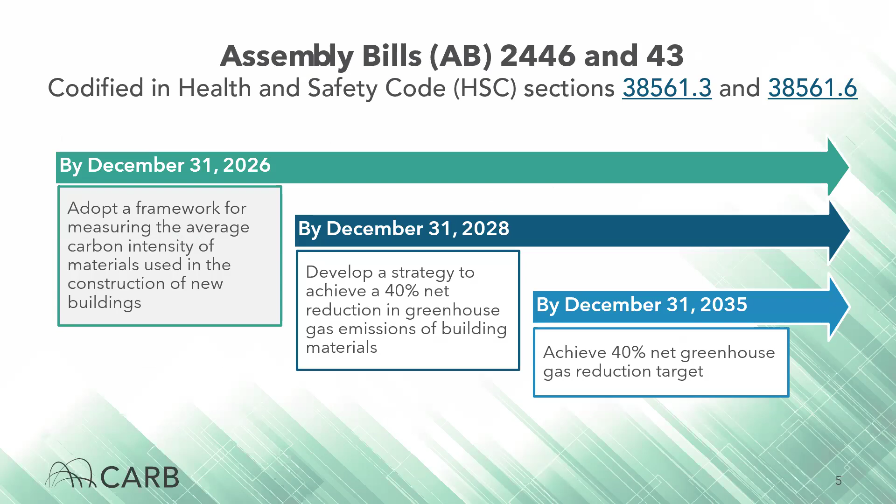I want to take a moment to revisit the statutory requirements that the concepts today are responsive to. Statute requires reporting for both covered projects and building materials, which are detailed in three key subparts of Health and Safety Code Section 38561.3. Under Health and Safety Code 38561.3(c)(1), construction projects with a minimum size of 5 residential units or 10,000 square feet of non-residential building space must submit a life cycle assessment, or LCA, to CARB.

In addition to project reporting requirements, building material manufacturers must also provide environmental product declarations, commonly referred to as EPDs, or other similarly robust life cycle data for the products they produce. Additionally, manufacturers of building materials are required to report data to CARB to ensure their products comply with applicable reduction targets in accordance with reporting and compliance requirements.

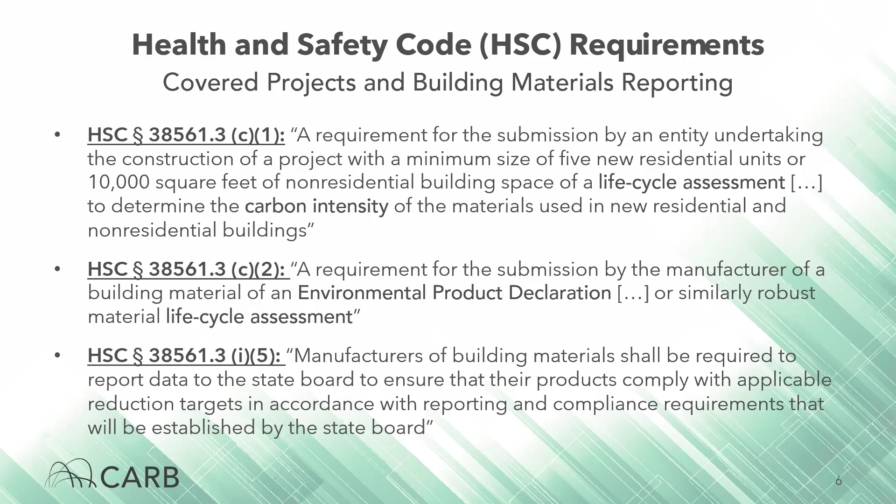CARB embodied carbon staff have conducted 2 public workshops, the first in September of 2024 and the second in March of 2025, and discussed both concepts for the framework, including the baseline and embodied carbon reporting requirements. At our prior workshops, we introduced staff concepts for building embodied carbon and our initial thinking on how to develop this framework. We discussed the statutory requirements guiding this reporting system, which I just recapped, and major milestones for the program to work towards. We also illustrated staff's initial thinking on which projects are covered, who the reporting entities are, and what would be the potential exemptions to reporting requirements.

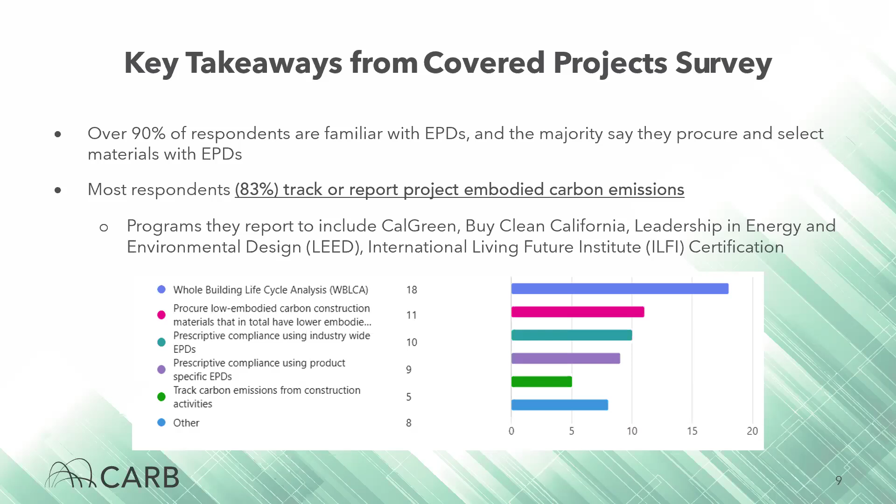As I mentioned in our last technical meeting in September, staff presented our concepts for a methodology to estimate baseline greenhouse gas emissions from California's building sector. So what is the baseline and how is it used? Well, the baseline is a profile of the current greenhouse gas emissions associated with building materials in California's building sector. Establishing a baseline is critical for two program functions. First, the baseline provides a snapshot of where emissions are concentrated in the building sector.

This allows CARB to rank sectors and materials by impact and to focus reporting and reduction strategies where they matter most. Second, the baseline allows CARB to quantify how much emissions reductions would be required to meet legislative mandates of a 40% net reduction target by end of 2035. The quantity of emissions reductions needed can then inform reduction strategies in future rulemaking sessions.

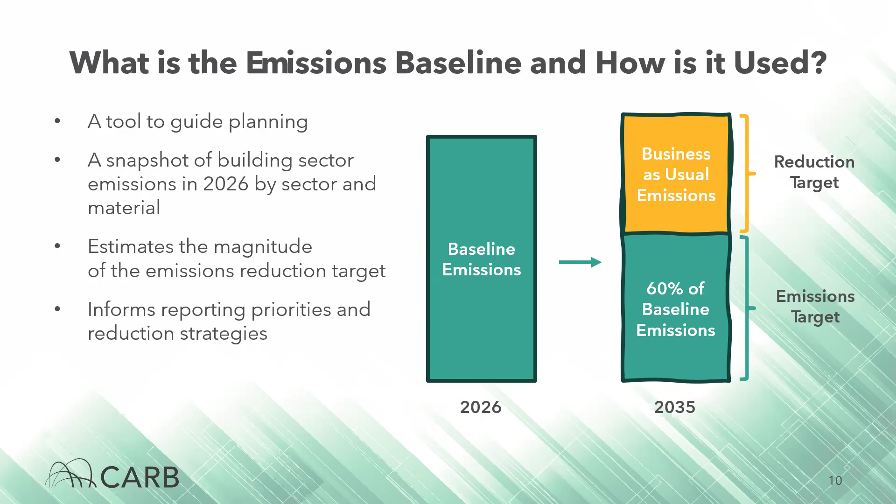Importantly, the baseline is a sector-wide emissions estimate. It's not an average or benchmark carbon intensity for specific building materials. And similarly, the 40% net reduction target does not mean that each building material will have a 40% reduction in the carbon intensity. Material-specific benchmarks and/or material-specific reduction targets are a separate concept that we will discuss in future rulemaking.

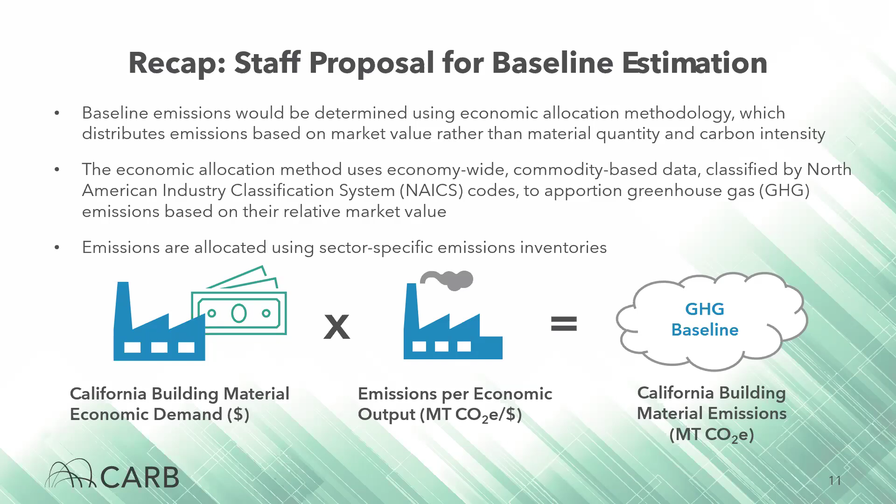Now, let's turn back to our concepts for reporting requirements. Staff have discussed in prior workshops that statute defines two categories of reporting entities under the relevant section of the Health and Safety Code, namely manufacturers and importers of building materials and property owners. Staff discussed concepts for reporting requirements for manufacturers and importers this morning. And in this session, staff will discuss in more detail concepts for reporting requirements for covered projects, including how projects can report required data to CARB. As a first step, let's review the context for project reporting requirements that we will be presenting today.

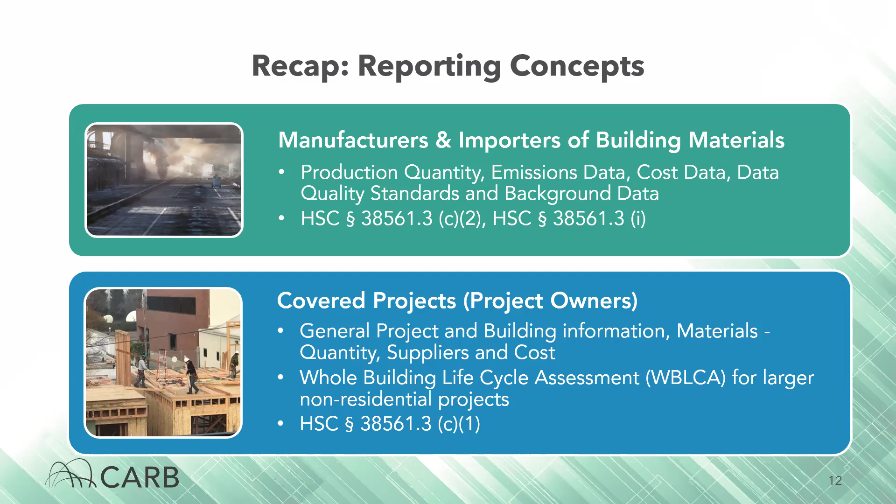First, I want to discuss the context. The state has multiple existing programs aimed at decarbonizing buildings, including increasing the use of low-carbon materials in new construction projects. CARB staff are coordinating with our partner agencies to learn how this program can build upon and support existing programs. For example, the Buy Clean California Act, which was enacted under Assembly Bill 262, applies to public works projects, and it requires environmental product declarations for eligible covered materials.

Starting in July of 2024, the California Green Building Code, or CalGreen, mandated whole building life cycle assessments for large non-residential and school buildings as one of the compliance options under life cycle assessment requirements in Section 5.409. The California Energy Commission's Building Energy Efficiency Standards, or Title 24, Part 6, also outline performance and prescriptive compliance for energy efficiency.

Our enabling statutes, which I've mentioned a few times here, detailed in California Health and Safety Code Section 38561.3(c)(1), lay out some clear requirements regarding reporting for covered new construction projects. As we discussed in prior workshops, covered new construction projects include residential projects with 5 or more residential units, as well as non-residential projects with more than 10,000 square feet of total non-residential space.

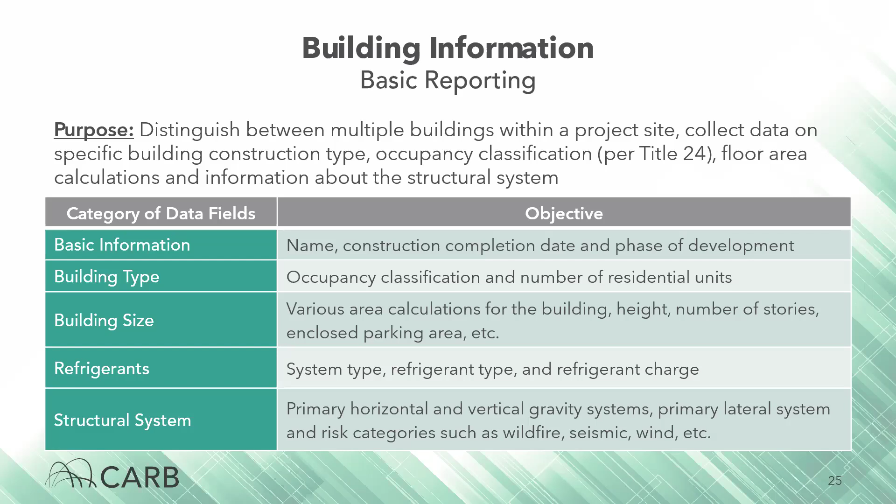Information on the refrigerants used in each building would also need to be reported, including the system type, refrigerant type, and refrigerant charge. With regards to the structural system, projects would report the primary horizontal and vertical systems and risk categories such as wildfire, seismic, wind, and more.

The Bill of Quantities, or BOQ, is the key piece of data staff proposed to use to calculate the carbon intensities per statute, to determine the carbon intensity of the materials used, and to evaluate cost impacts of the regulation. Entities would report details about all the materials used in the projects, primarily their quantity, supplier, and associated product costs.

The data on the quantities of materials may be sourced either from as-designed data or as-built data. As-designed data may be determined from modeled information in accordance with the construction documents. On the other hand, as-built data may be established using measured quantities of materials in accordance with shop drawings, as-built documentation, record documents, supplemental records, and through on-site measurement of material quantity, or a combination of both.

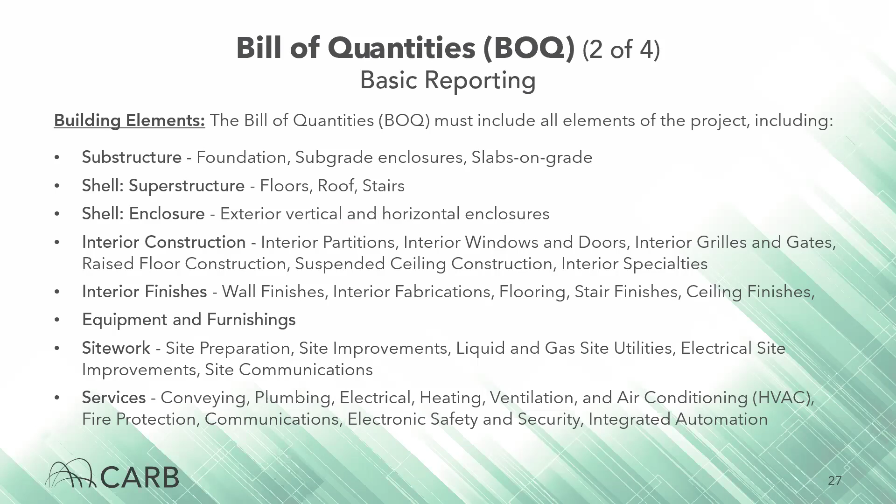Note that the Bill of Quantities must include all elements of the project, namely the following: substructure, for example, foundation; shell superstructure, including floors, roof, stairs; shell enclosure, exterior vertical and horizontal enclosures; interior construction, including interior partitions and interior windows and doors; interior finishes, such as wall finishes, interior fabrications, flooring; equipment and furnishings; site work like site preparation, site improvements, liquid and gas site utilities; services, including conveying, plumbing, electrical, heating, ventilation and air conditioning, and fire protection.

In accordance with product source disclosure requirements that apply to importers and manufacturers of building materials in California, as discussed in the manufacturer reporting requirements, reporting entities for covered projects must maintain records of product source disclosures for all regulated materials used in the construction of each project. These disclosures must be made available upon request by the executive officer.

Here we have the exact categories of data fields that need to be reported, which include material name, supplier name, manufacturer location, quantity and unit, purchase price, building element, where projects must associate materials in the BOQ with the building elements that it is used for, installation location, where projects must associate materials in the BOQ with the building associated with the installed material. The objective of collecting this information on materials used by the project is to determine their carbon intensities. CARB would generate default carbon intensities from the USEEIO model linked to building element classifications.

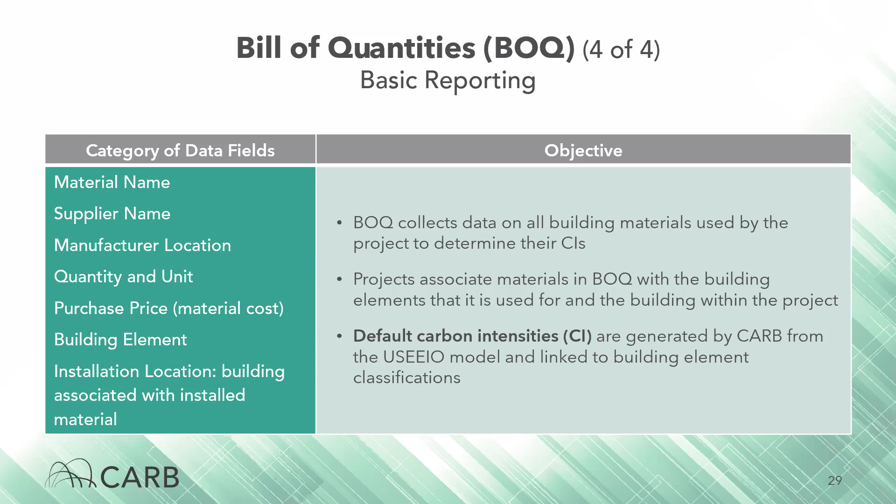I'll now hand it over to my colleague, Aditi. Thank you, Spencer. We'll now delve into the details of the whole building life cycle assessment, or WBLCA reporting concept.

Staff has identified three key purposes for this reporting concept. First is its ability to inform building design. The preparation of and results from the whole building LCA should be used to inform decision-making during the design phase of a building project to reduce the life cycle greenhouse gas emissions associated with the building. Second is as a means to meet reporting requirements. Whole building LCAs reported to CARB shall report consistent and comparable results, which can support accurate tracking of emissions towards regulatory targets outlined by the statute.

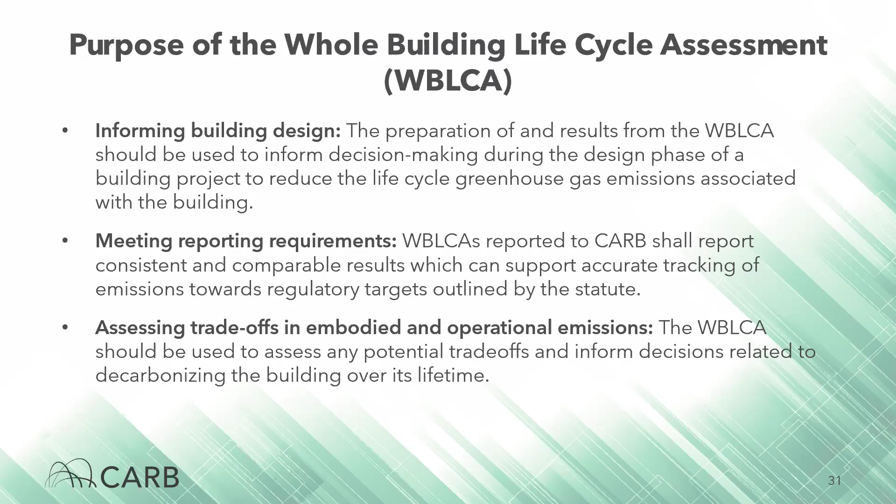And third is to assess trade-offs in embodied and operational emissions. The whole building LCA should be used to assess any potential trade-offs and inform decisions related to decarbonizing the building over its lifetime.

So, as a reminder, all covered projects are required to meet basic reporting requirements, while large non-residential projects would also report whole building LCA results. So, which projects are subject to this concept? Only large non-residential projects are included here.

Specifically, the staff concept is that projects with more than 50,000 square feet of non-residential building space report the results of a whole building life cycle assessment. This threshold was calculated as the 80th percentile of square footage of non-residential buildings in the CIRB 2023 building permit dataset. This threshold also aligns with the performance option of the mandatory CALGreen embodied carbon measures effective January 1, 2026, section 5.409.

CARB has published a complete set of whole building LCA reporting requirements and the details of the life cycle assessment approach, which are documented in the posted materials on the website, part of the 100-page documents for project reporting. We'll go through some of the key requirements in the next few slides. First, let's look at the methodology.

Whole building LCA results shall have a data set compliant with ISO 14044, ISO 21930, and additional CARB requirements for EPDs, as well as conform to ISO 21931 and/or EN 15978, California Green Building Code section 5.409, in addition to CARB requirements.

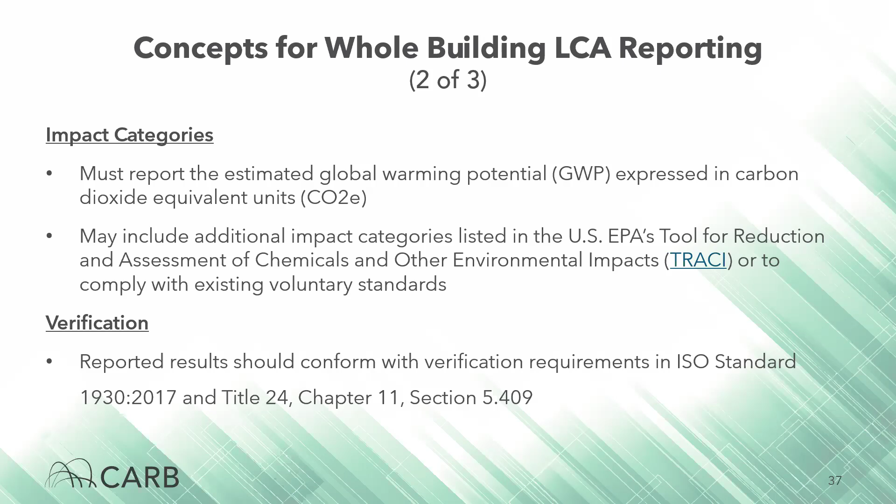With respect to verification, reported results should conform with verification requirements in ISO Standard 1930 and Title 24, Chapter 11, Section 5.409. If any carbon offsets, carbon credits, renewable energy credits, or environmental attribute crediting mechanisms are used in the calculation of the primary GWP impact estimate, primary results must also be reported without the included attributes.

If biogenic carbon is included in the assessment, all emissions associated with biogenic carbon must be reported separately from fossil emissions per life cycle stage. Further, biogenic carbon stored in building materials during the building's life should not be used to offset biogenic or fossil carbon emissions. Biogenic carbon should be reported separately from the primary GWP impact results.

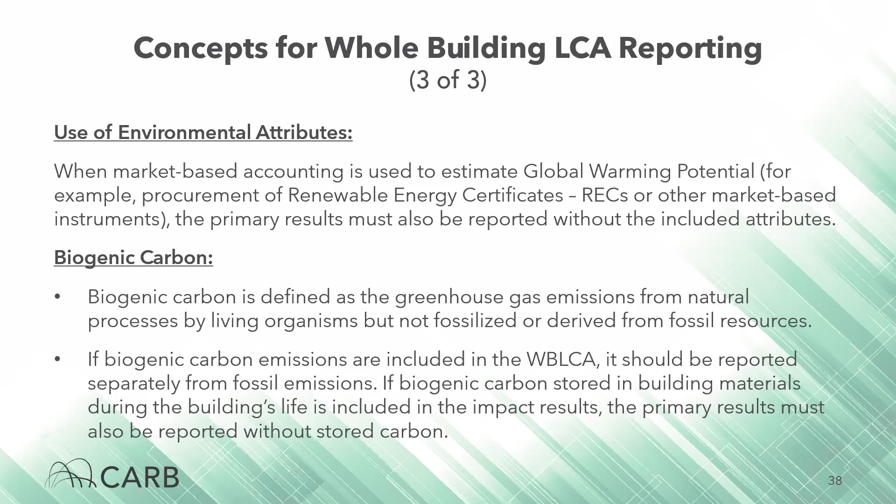The next key question is, what types of data should be reported? Staff is considering 3 key categories of data. First is all the information and assumptions about the life cycle assessment. This would include information about who is the assessor, which software tool was used, the LCIA method or the life cycle impact assessment method, what portion of the physical scope was included, and other inclusions like refrigerants, and also the verification process. Next, projects must report the LCA results separated by life cycle stage and building element.

Third, upload the LCA report generated by a software tool in PDF format. Please note that all the required fields for the whole building LCA reporting will be submitted through the reporting tool. Additionally, projects must use CARB-approved EPDs to report global warming potential expressed in kilograms of carbon dioxide equivalent, that is kg CO2e, per declared unit of each building material in the whole building LCA.

For each material assessed while conducting a whole building LCA, the categories of data fields required to be reported include the following: material carbon intensity data source, Carbon Leadership Forum data category, EPD declaration number, estimated useful life, and carbon intensity for each life cycle stage.

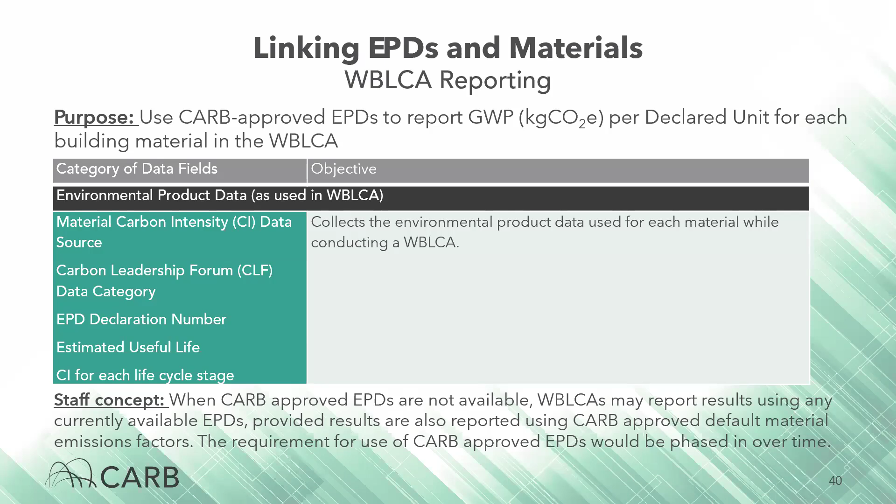For the next section, I'll hand it over to my colleague, Jeremy Loeb. Thank you, Aditi. My name is Jeremy Loeb. I am an air resources engineer in the analysis section.

So now that we've walked through the basic reporting and the whole building LCA reporting track concepts, I'll show how they come together in the project reporting tool. This is an Excel-based workbook that lets projects meet their reporting requirements. I'll start with a quick overview of how the tool works, and then we'll take a walkthrough of each worksheet. You can already find the tool on the Embodied Carbon program website, along with a detailed user guide and calculation methodology.

The project reporting tool uses a whole building lifecycle assessment framework to calculate the greenhouse gas emissions and carbon intensity for new construction at the material, building, and project levels. To do that, it needs project-specific inputs, things like building characteristics and the detailed list of materials that we just presented. The tool includes a comprehensive set of data fields along with built-in reference data sets and data crosswalks that are still being refined. We really would appreciate your feedback, both on the scope of the data that we're requesting from projects and also on ways to improve the accuracy of modeled results using better data sources.

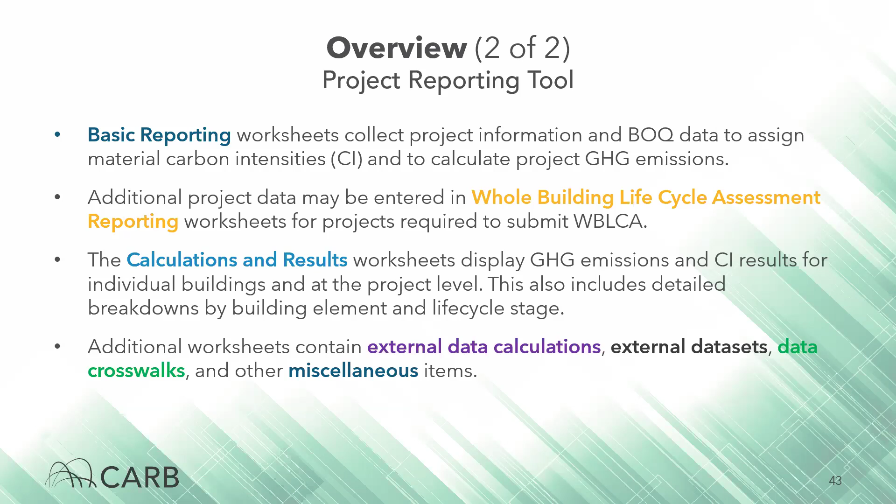So the goal of the project reporting tool is to determine the carbon intensity of materials used in new residential and non-residential buildings, fulfilling the statutory requirements of HSC 38561.3C1. In simple terms, it links each material used in the project to the best available carbon intensity data. One option is to use product-specific environmental product declarations, or EPDs. Projects can source these from tools like Tally or OneClick, or databases like EC3, or directly from manufacturers.

But we know that not every material has a product EPD. For those cases, the tool offers two other data sources. The first is US EEIO emission factors, developed by CARB, and these are automatically applied based on CSI MasterFormat codes and reported cost data. Alternately, the Carbon Leadership Forum baseline data is another data source which projects can select using the 2025 North American material baselines that they've provided for us. So together, these options ensure that every material can be assigned an emission factor, even if a product EPD is not available.

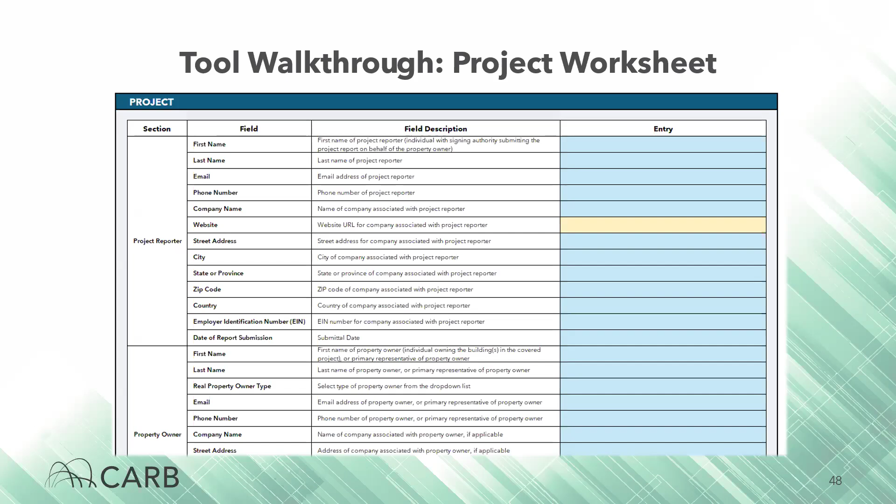Next up, let's look at the basic reporting worksheets, which must be completed by all covered projects. The first basic reporting worksheet is the project worksheet, which gathers general project information, including contact details, location, size, cost. In the entry column, you can see the light blue cells. These are the required fields, and light yellow cells are coded as optional. These optional fields do support internal analytics, and they help correlate carbon intensity results with other building characteristics.

Next up, we have the building worksheet. This worksheet collects specific details about each building in the project, such as the building type, size, and structural system information. This worksheet also allows for multiple buildings to be reported in a single project. Each row of data entry represents a unique building in the project. You can list up to 50 buildings per project in the current version of this tool, or enter aggregate data if multiple buildings share common features. There's also some gray cells in this worksheet. Those cells indicate fields that either don't apply based on user choices or that contain calculated values. So in either situation, the gray cells indicate no entry is needed.

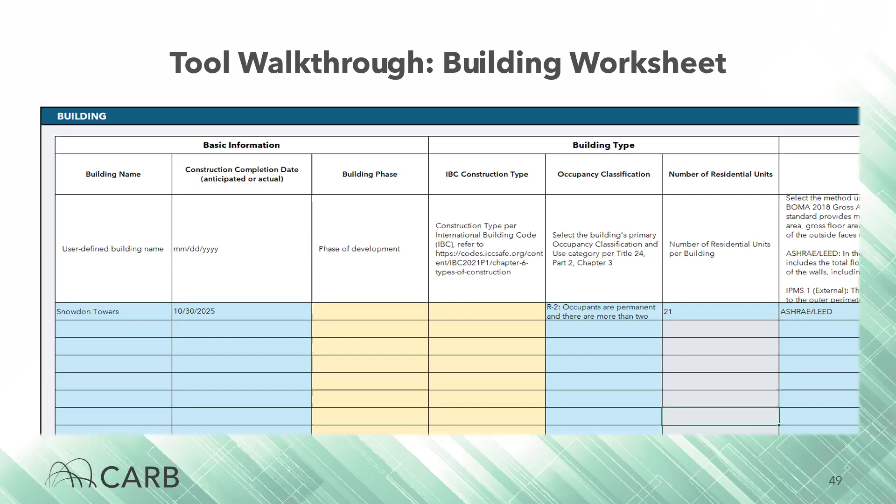All right. Now we've arrived at the Bill of Quantities worksheet, or BOQ for short. The BOQ is probably the most data-intensive aspect of the reporting tool because it requires a relatively complete list of materials used by the project as documented in the approved construction documents used in applying for a building permit from the concerned authority having jurisdiction, or AHJ, i.e. as-designed or as-built materials quantity and cost estimates. Staff understands the effort involved in completing this worksheet thoroughly, and we are looking for feedback on how to make this process feasible for a range of project types.

The BOQ records each material's supplier, quantity, purchase price, installation location, and CSI MasterFormat code. These CSI MasterFormat codes and cost data are what we use to link these materials to the default US EEIO emission factors. If that information isn't available, reporters can opt to apply a product EPD or a Carbon Leadership Forum baseline factor. So that wraps up the basic reporting requirements.

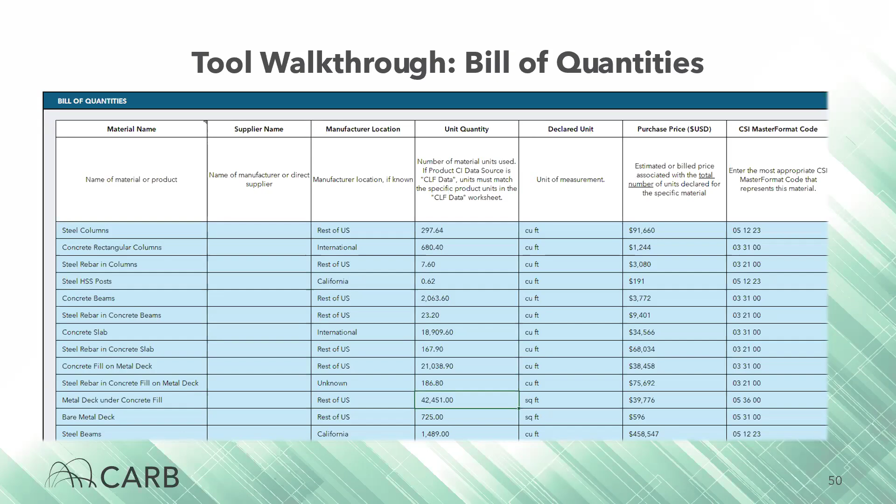Next, we turn to the whole building reporting track requirements, beginning with the material CIs sheet. The material CIs assign emission factors to each material listed in the BOQ. Every material is paired with a data source, currently either product EPD, CLF baseline, or US EEIO. Depending on which CI data source you select, certain fields become required. US EEIO is the default and requires no additional data entry.

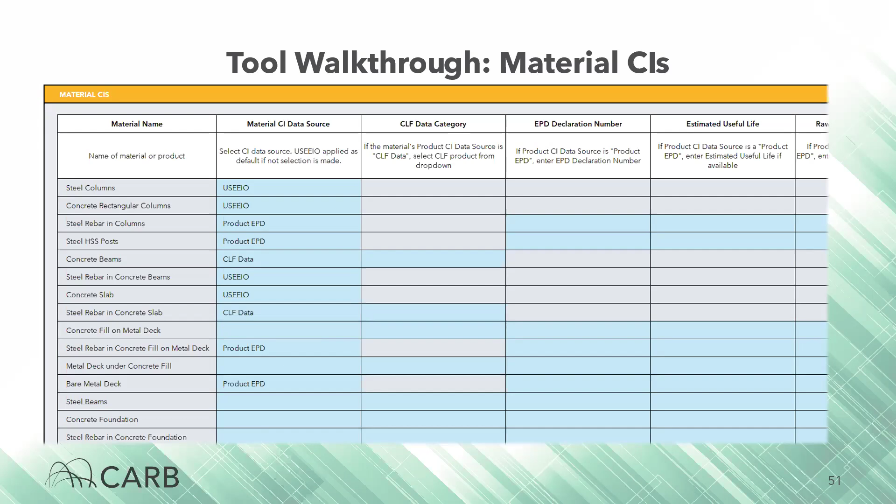The construction worksheet covers emissions from construction activities. By default, it uses US EEIO-derived emission factors. However, projects can enter their own fuel use data in this worksheet for greater accuracy. To do so, you start by selecting a construction activity from the drop-down list, and then enter the total fuel usage associated with that activity.

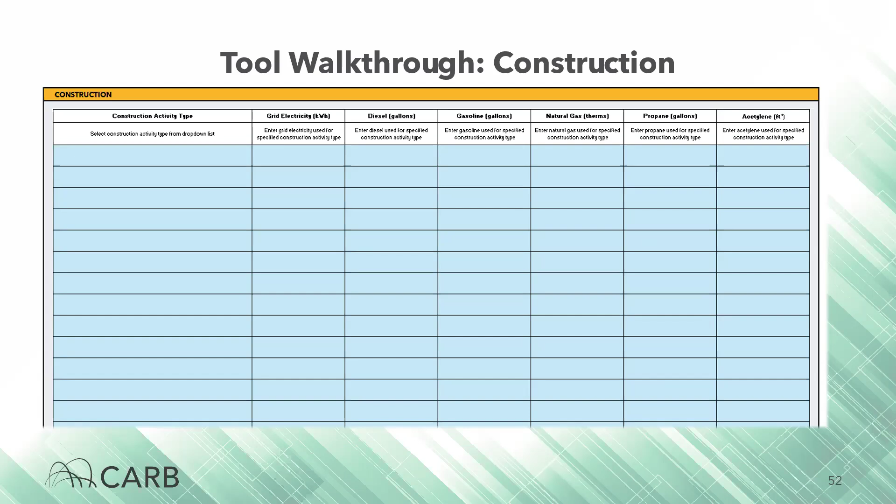If your project does not have construction activity-specific fuel usage values, you can also enter project-wide fuel data if that is available. I will say we are exploring ways to collect fuel usage data for projects that haven't started construction. And we also welcome your ideas on software tools or processes that might help in that regard.

The next whole building LCA worksheet is the operations sheet. The operations sheet uses outputs from Title 24 Energy Code Compliance software. This software is required for the performance compliance path described in Title 24, Part 6. The performance compliance path allows a building's modeled energy use to demonstrate compliance rather than following all prescriptive requirements.

Currently, the 2025 Building Energy Efficiency Standards only permits a single software solution for this energy model called the California Building Energy Code Compliance, or CBECC. CBECC is the public domain compliance software developed by California Energy Commission to demonstrate performance compliance with the residential, non-residential, and multifamily regulations in the Energy Code.

The operations worksheet is split into two sections, a proposed design and a standard design section. The proposed design section estimates the emissions profile of the building that is actually being built, whereas the standard design measures the emissions profile of that same building using more generic assumptions about building performance. The standard design data fields are optional, and they are not used in the CI calculations.

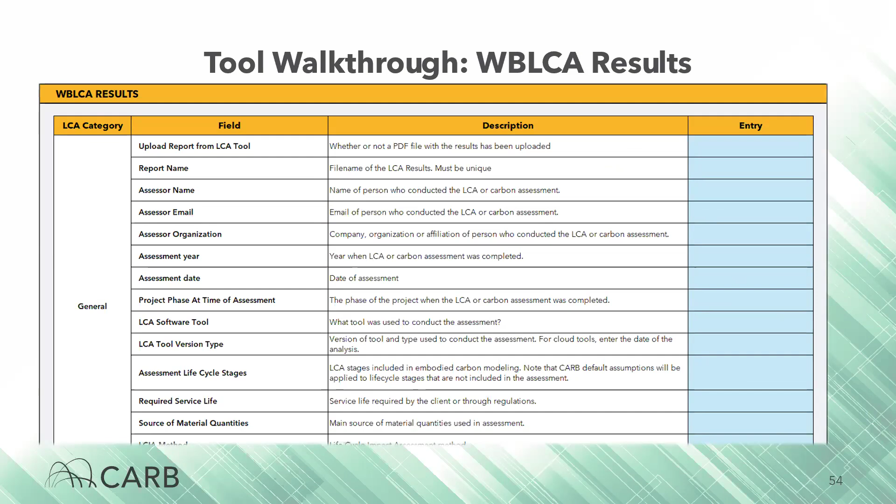Okay, now for the fun stuff. We'll look at how the tool calculates greenhouse gas and carbon intensity results, beginning with the embodied carbon emissions associated with the materials used by the project. The embodied carbon emissions worksheet evaluates cradle-to-grave emission factors, stages A1 through C4, except for stages B6, B7, and B8, which are evaluated separately as operational emissions at the building level. The calculation is relatively straightforward. Each material's emission factor is multiplied by the quantity used by the project.

For the replacement stage B4, there's a bit of an exception there. We used an estimated useful life value to determine how many times a given product is replaced over the building's lifespan. For example, asphalt shingles replaced every 20 years in a building with a 60-year lifespan would count as roughly 3 cycles. There's an asterisk there because future emissions are proposed to be discounted to reflect expected decarbonization trends. For all the juicy details on those calculations, those are documented and posted on the Embodied Carbon website.

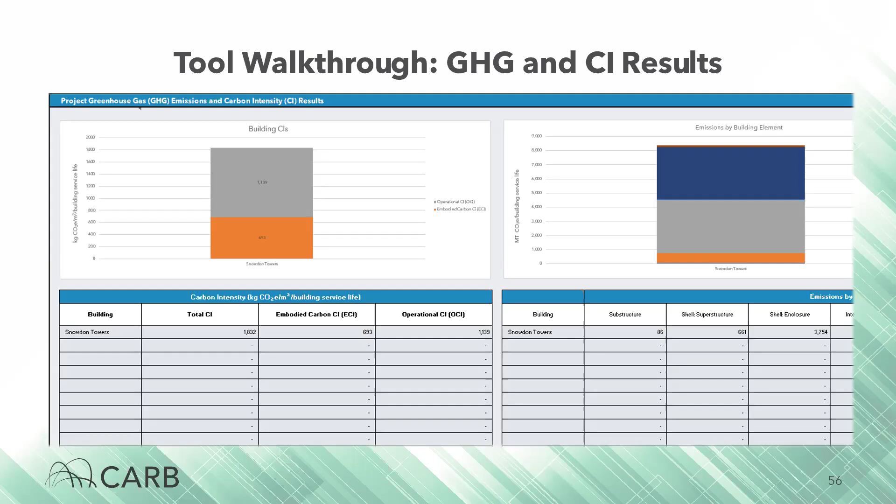Additionally, building operational emissions, stages B6 through B8, are introduced in this table. Stage B6 covers the operational energy emissions and refrigerant emissions. Stage B7 evaluates water emissions, and stage B8 considers the impact of building siting on associated commuting emissions.

That wraps up our brief walkthrough of the project reporting tool. We would love to hear your feedback: what features work well, what could be simplified, what data points are challenging to provide, and how the tool could work better in your workflow. Your insights will help us refine both the tool and the underlying modeling approach in future updates. I'm going to hand this off now to my colleague, Spencer.

Thanks, Jeremy. We will review the public feedback received and open it up for a discussion. As a way to summarize, staff has compiled our thinking on the various topics we have received from the public. Let's dive into each one. First, it was recommended that CARB should leverage existing voluntary efforts and industry commitments. Staff has aligned the data fields in the reporting tool with data schemas like Echo Project. Staff is also harmonizing bill of quantities data with building information modeling tool outputs.

Second, staff received concerns about the varying quality of EPDs. Staff agrees that this can impair the quality of the data reported to CARB, and thus reporting entities can choose from multiple sources of data while reporting the emissions associated with each building material within the project.

Staff's specific concerns and recommendations to improve EPD data quality were also addressed within the building material manufacturer's reporting scope earlier this morning. Third, staff received a variety of comments about including and excluding specific life cycle stages. Staff recommends that the entire life cycle of a project, A1 to C4, be included in the assessment. Project-specific data is only required for life cycle stages A1 to A3. CARB will assign default values to all other life cycle stages in lieu of project-specific or EPD data.

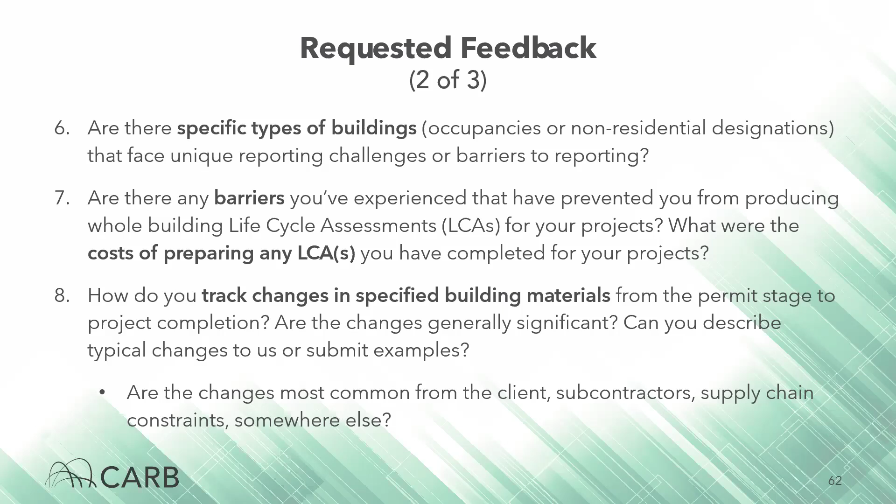Should there be thresholds or cutoff considerations for materials that are reported for the bill of quantities, such as exemptions for less than 5% of the total element level 3 subcategory in cost, as one example? Should CARB encourage the submission of multiple iterations of embodied carbon data from covered projects, perhaps at different stages, such as in addition to the permit stage reporting, perhaps at the certificate of occupancy? In particular, in cases where material quantities or cost may have changed significantly from when the permit was issued.

And I think that concludes the questions. I think we'll come down and join you at the table and look forward to some discussion. Similar to earlier this morning's session, if there's people that would like to have discussion in the room, stack your name tags end over end so we can clearly see. For folks on the Zoom call, please submit things into the question and answer feature of Zoom, and we will try our best to integrate that in a timely manner into the discussion. Again, discussion is better suited for asking clarifying questions around the concepts presented today. If what you have is more of a comment, please reserve it for the public comment period that will follow after the discussion period.

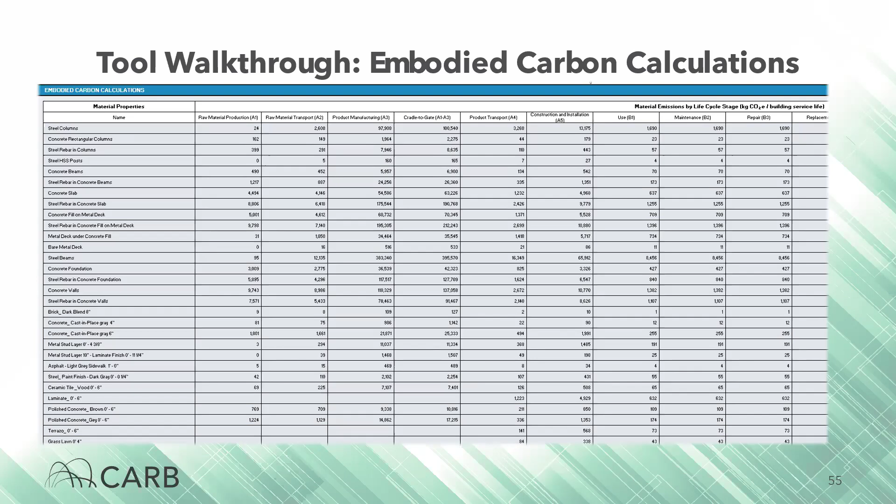Thanks. Jordan Palmeri, CLF. Wow, you folks have been busy. This is really impressive. Thank you. One observation, it seems like you've basically created a whole building LCA tool in Excel. And I am a little confused as to how people submit other whole building LCA results through other third-party tools. Are they doing that twice, like once in your tool with all the quantities, and then it seemed like there was an opportunity to upload other third-party whole building LCAs?

Yeah, so let me just clarify a little bit. I think the basic reporting requirements are data that we've heard from projects are generally available and tracked by a project to some extent, either during the initial design phase or through the permit issuance. That does not include carbon intensities, right? The basic requirements that are reported are project information, building information, and quantity information. The whole building LCA results would then be reported. The tool is our concept for a template, which would allow you to report either set of data.

The tool also includes some functionality to allow for an estimation of carbon intensity, just so that you can understand the method, or so that we can illustrate the methodologies that we're proposing. So right now, the tool includes some data related to material carbon intensities, as well as the default carbon intensity assumptions, so that we can illustrate for stakeholders the types of calculations or methodologies that we've proposed for estimating a project carbon intensity based on the basic reporting.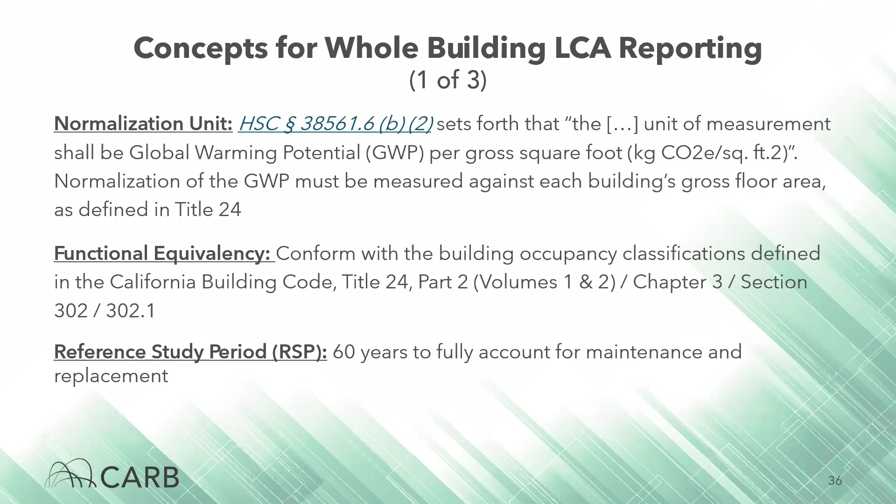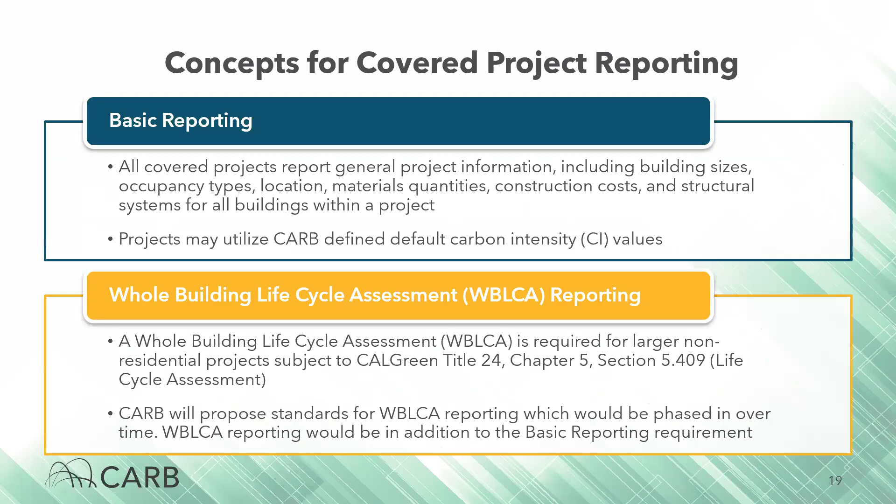Regarding the hospitals and military installation exception, that was an initial staff concept around what buildings would be potentially more critical to exclude. And so if you or anybody else has comments on why you think that's not appropriate or why you think we should include those, once again, please include that in your written feedback. And then I'm not going to talk about the data quality standard as much. I just wanted to address those two.

Yeah, so thank you for the comments. I think that's exactly right. I do think that, as far as we're concerned, we're operating under statute there. As far as data quality or the data desired, I kind of tried to speak to that earlier. There seems to be a real disparity in what data are out there today.

And if you look at other markets, other jurisdictions outside the US even, there are different sorts of systems in place with respect to cost estimation and tracking of material quantities, which are market standard. And I think some of those systems perhaps do provide some examples for us. And I think that underpins why we've articulated collecting some cost data on materials, partly because, as we talked about a little bit under the EPD, as a characterization factor, valuation is kind of a uniform indicator.

And spend-based accounting is something that a lot of firms do. If you are a firm that tracks as-built or as-designed material use, or if you're more vertically integrated, spend-based accounting is something that I have heard from folks is a tool used by the industry. And so I think that underpins the issue of collecting cost data. That's a little bit more responding to another comment in the chat, but I think it's connected to what you're asking. We're open to hearing about what type of data is feasible.

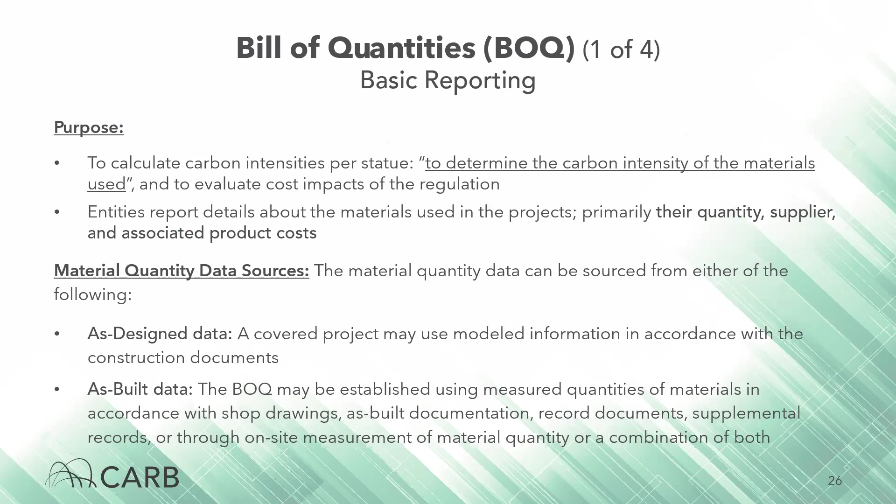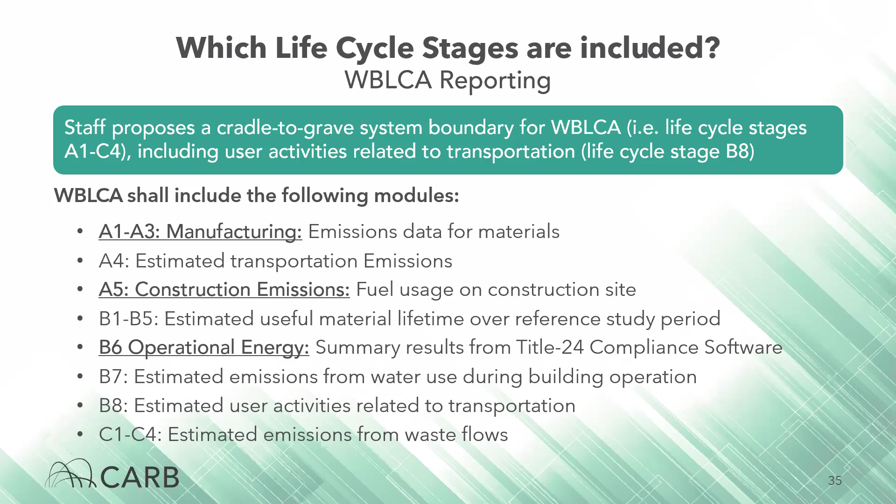not duplicating anything. So the other part is how do we make use of or benefit from the existing data sources out there? So today, all the things that staff is talking about are concepts, right? We're just putting it out there, trying to get your feedback, all the experts' feedback. This is our take based on what's out there and what we need, but you tell us or identify the gaps and other data sources that we can use. So that's really the big picture, but really appreciate everybody's input today.

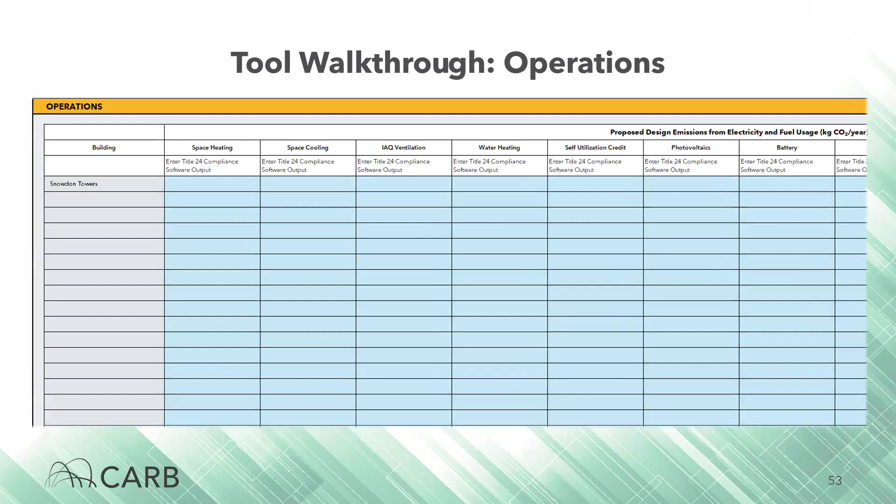So I'm not trying to wrap it up. No, but this is Pamela Gupta, who's our branch chief for building decarbonization at the Air Resources Board. I don't know if we introduced. Yeah, just make sure that I'm just listening. So should we go back? I think we should continue around the table. Let's just keep going around. Okay, go ahead. Thanks. Joseph Shaka with Eastern Research Group.

Couple of comments and questions here on the how to calculate A5 challenge. And it really is a challenge. One thing to think about, UC Davis, Professor Harvey's group has been working on this for pavements. I know it's not really applicable to buildings, but at least the concept is in terms of identifying functional units like paving or milling a lane mile of road, which I could translate into something like grading per cubic yard of mass grade, or pouring and finishing a square meter of concrete floor,

where instead of reporting operational hours or fuel consumption, you could report in those terms: we laid this many square feet of concrete floor, so you can add the right data. If you had those kinds of scenarios to essentially estimate the A5 emissions associated with construction activities, that could potentially simplify things for the reporting community. Right now, I think it's a really challenging quest to get all that fuel consumption. So just something to think about there.